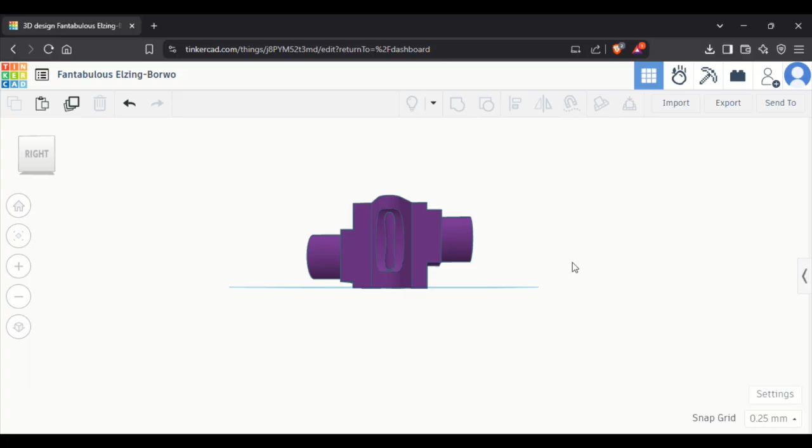Okay, right side first. So this is going to be a Martin style adapter for Corvair engines. It would be a draw-through turbo adapter for a twin turbo setup, is what I designed it for here. So standard flanges, probably going to about double the height of your carburetors currently. Maybe not quite. I'm still working on the actual dimensions of it. This is really just proof of concept, something that I kept envisioning and hoping that it will work.

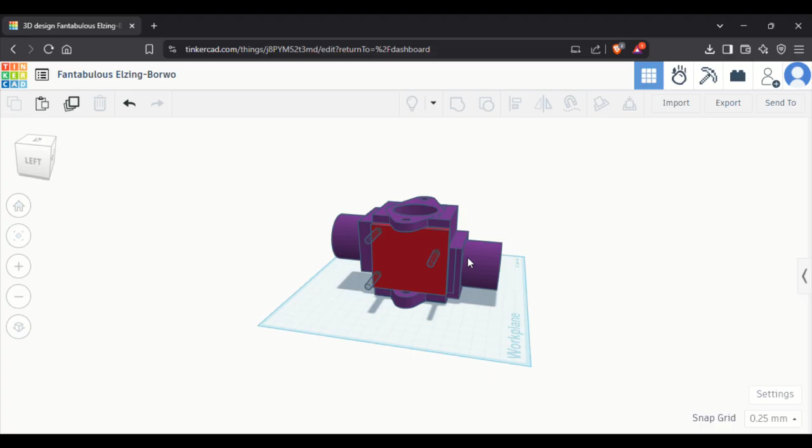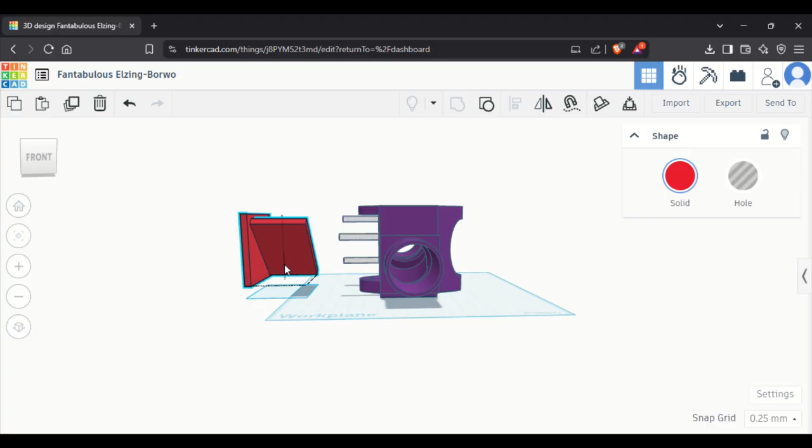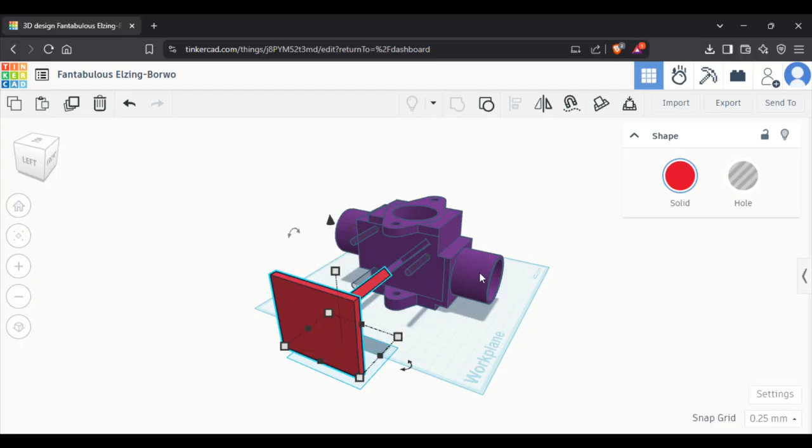So it is basically two 90-degree adapters on top of each other. And then in between, there will be a reed cage, if you will, and we can use some sort of either a carbon fiber or other reed material, just like a two-stroke dirt bike would use on this here. As you can see inside, without the cage, it just all goes straight through, which is kind of cool also because if you wanted to run it as just a regular carburetor, you could cap these and then cap this, and you basically just have a giant phenolic spacer, depending on what material I get this made out of. So,

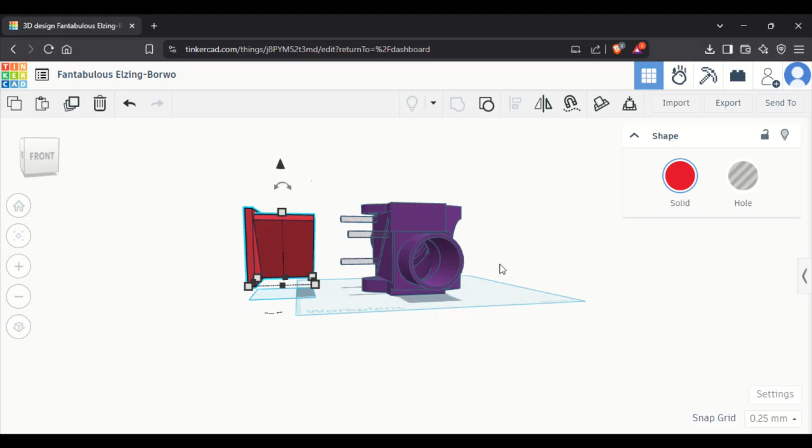again, it's a Martin style system, so during vacuum operation, idle, whatever, it's going to just drip fuel through the reed straight into the engine. So there shouldn't be any throttle response issues, and it should idle basically the same way it does stock. And then under boost, the reed will close and you'll pull air and fuel into the turbo, and then it'll pressurize into the cylinder.

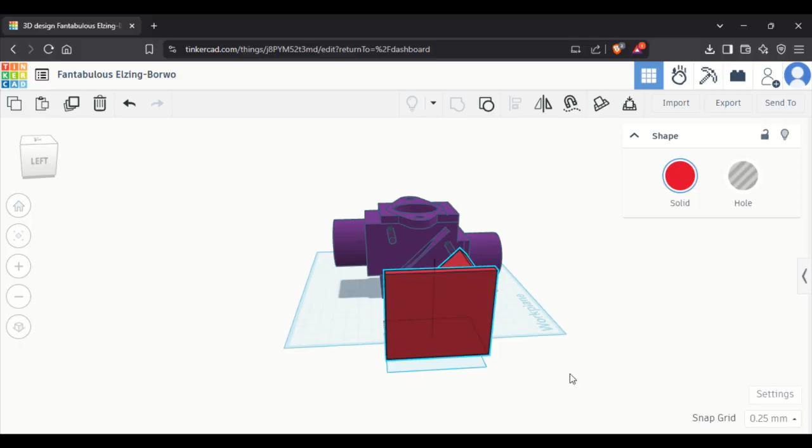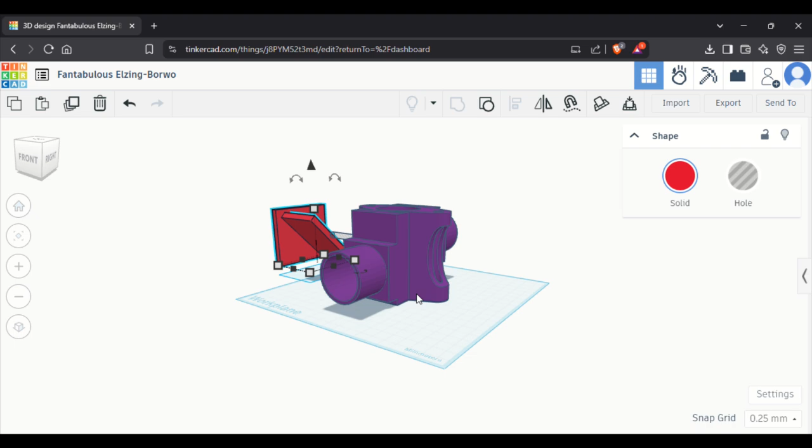So that's it though. It seems like a really simple thing, and I'm surprised I haven't seen anyone do anything like this. The idea would be to run the two turbos. First of all, small turbos. We're going to utilize small pipe. We want very little surface area, and we are using a length of pipe. So turbos would be mounted where the mufflers would normally be, and so there will be a little bit of turbo lag, but I mean, I'm not sure. I've seen people run turbos way further away.

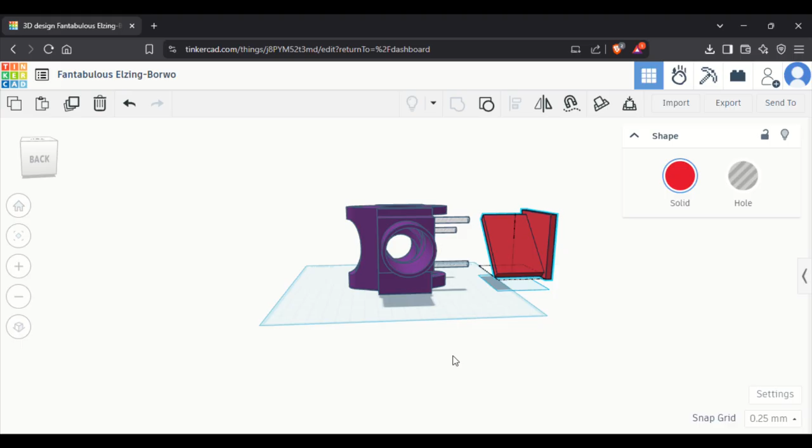The only difference here is that the fuel and air mixture is going to be passed through the turbo, so that distance could make a difference. But again, the point of the Martin system, I guess, would be to negate some of that lag, or at least throttle response issue. So again, it's just a concept that I thought would be cool to work on, and I don't know. It turned out way better than I thought it would.

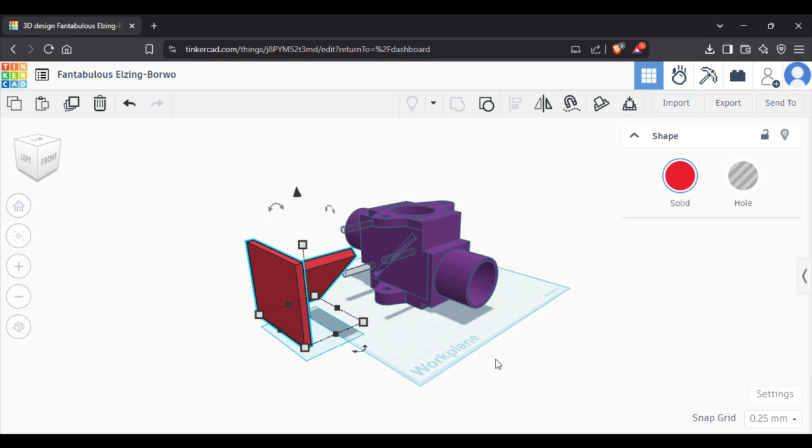I'm probably going to 3D print this just to see how it looks to scale, and then I'll know exactly how the carburetors will sit and how the linkage and everything will line up. But I'm hoping that everything will work pretty much factory. That's the idea anyway.